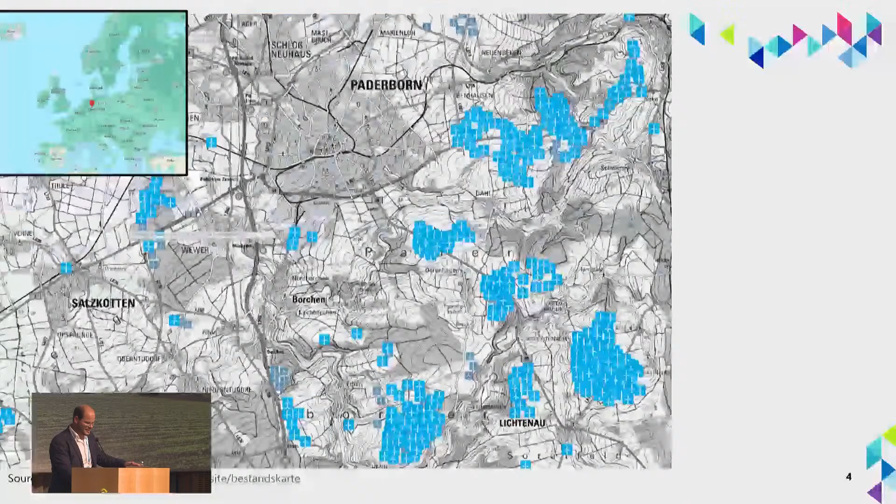Let's switch to a map that makes it easier. I hope you can see it on the left and right side. This is the city of Paderborn, surrounded by small villages, and especially in the south and east of Paderborn we have a lot of wind turbines. By the way, if you want to visit us, we are somewhere there in Germany.

So we are not a coastal region. Usually at the coast in Germany or in Denmark we find a lot of wind turbines, but we are about 200 to 250 kilometers away from the coast. So it's not a coastal area, but we have these wind turbines.

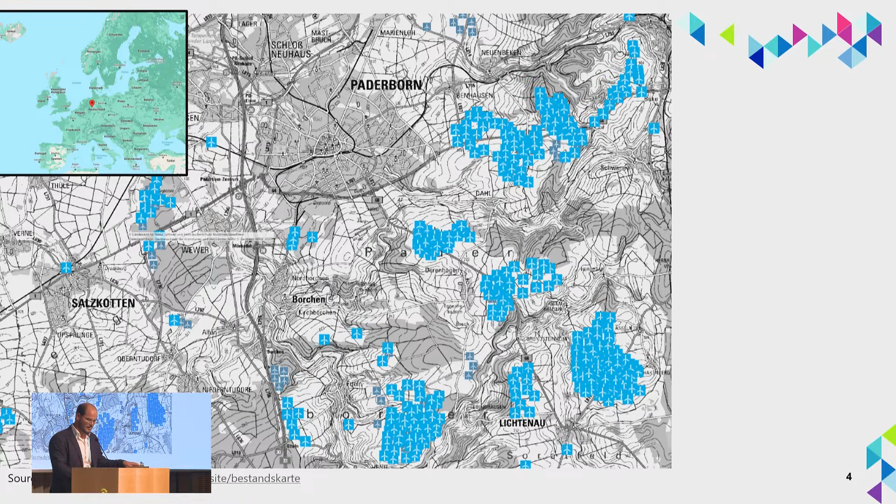In addition to wind turbines, we also have PV systems - a lot placed on rooftops, ground-mounted systems, and so on. And as you've seen on the first slide, we have agricultural land, so we also have some biogas and biomass plants, shown as the little green dots on the slides.

So we have a lot of renewable energy there in Paderborn, and the discussion was always, are we on track or not? I would guess maybe Paderborn, yes, but Paderborn is not all of Europe. So I want to show you a few figures.

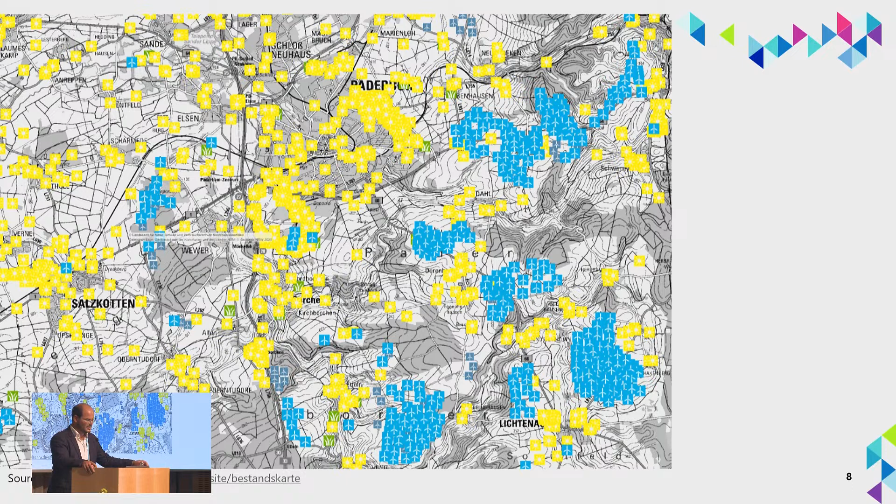Let's come back to this map, because I mentioned we have renewables in the system, and now we can decarbonize our power sector. But there's another thing in Paderborn which is very important: we have a lot of industry there. That makes it different to coastal regions in Germany where we don't have that much industry. In Paderborn you find industry, for example Heidelberg Cement, now Heidelberg Materials, a cement producer, a very energy intensive industry.

Benteler Steel Tube, they do not produce steel, but they process steel, let's call it a cylinder, to make the tubes, so they need a lot of heat to run their processes. And we have some others. Paderborner, that's the name of the brewery - usually in Germany we just call breweries like the city. When you're in Paderborn, the beer name is Paderborner, not the best one in Germany, but anyway, they need heat to run their processes as well. Stute, they cook marmalade and make juices and so on.

So we can think about the heat that they use, and I want to roughly split that into a few heat temperature levels. Heidelberg Cement and Benteler Steel Tube need high temperature heat - they have to glow the steel cylinders, burn the clinker and so on. Whereas Stute and Paderborner need low to medium temperature, so you will not cook your marmalade at 1000 degrees Celsius, but something between 100 and 150, I guess.

And then there are some other industries like Benteler Automotive, Claas, they produce harvesters. For them, the majority of their energy use is electricity to run the manufacturing lines. So you see we have different temperature needs.

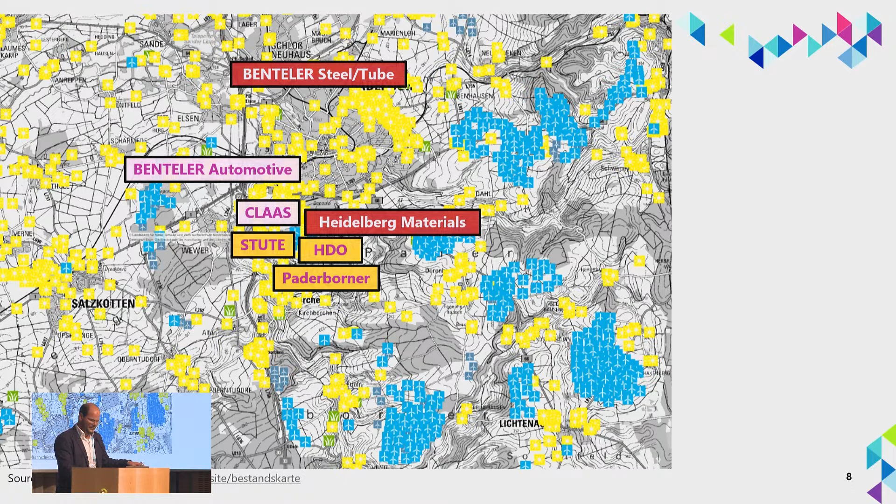Now, if we want to figure out how to decarbonize industry, we have to think about what the energy needs are. If we want to supply industry with renewables, you start with the needs and figure out what they need - electricity, heat, or anything else - and then think how we can supply that. Which temperature level is must, or do they use in their processes? How can we arrive at this temperature level?

For example, Benteler Steel Tube at the moment uses a lot of natural gas, but they see that first, natural gas is not the best solution if you want to decarbonize your processes, and also the price is rising for natural gas, so they think about other things. For them, the easiest and simplest way is to just say, give me any green gas, and I can run my process as it is, just replacing natural gas with green gas, and then I'm fine. You see the capacities built there, and we heard this wonderful lecture of Eva on Power to X - we have the capacity of renewables to produce renewable gas, hydrogen, or other fuels in the region, and there are ideas to do that, but maybe that's not the best way.

Maybe we can rethink the process design. Maybe we can find other places to first reduce the energy needs. So the question that arises: what are the energy needs? Which energy carrier can we use? What is the resulting energy demand that needs to come from the grid? Which conversion technologies do we use? And what about transport?

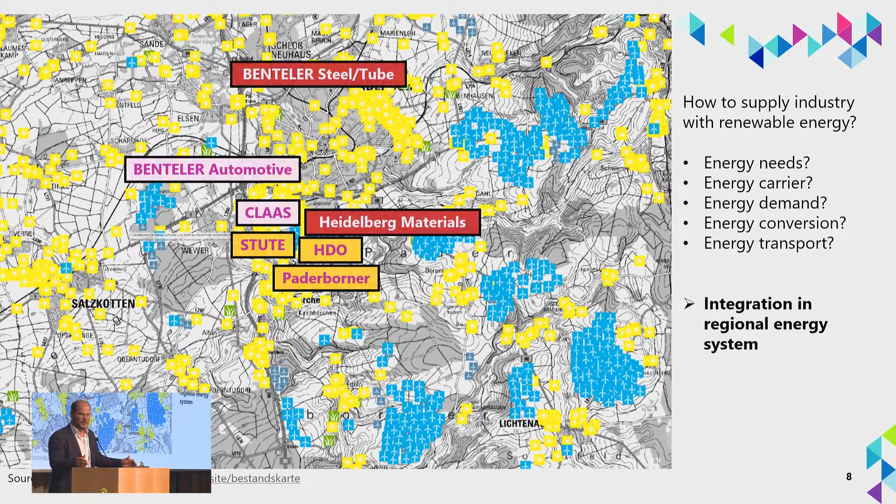And this is the point where we say, okay, if we want to decarbonize industry, we have to think of industry in the integration of regional energy systems. So what do we have, what do we need, and how can this match?

Let's go to a more global view, and I'll show you the final energy demand worldwide. We have transport, the dark blue part below, but I don't want to talk about transport today. Then we have households, also mentioned in the last invited lectures, on how to decarbonize our building sector. But the red part, you see, 30% of our total final energy demand is used in industry, and of that, two thirds are used for process heat.

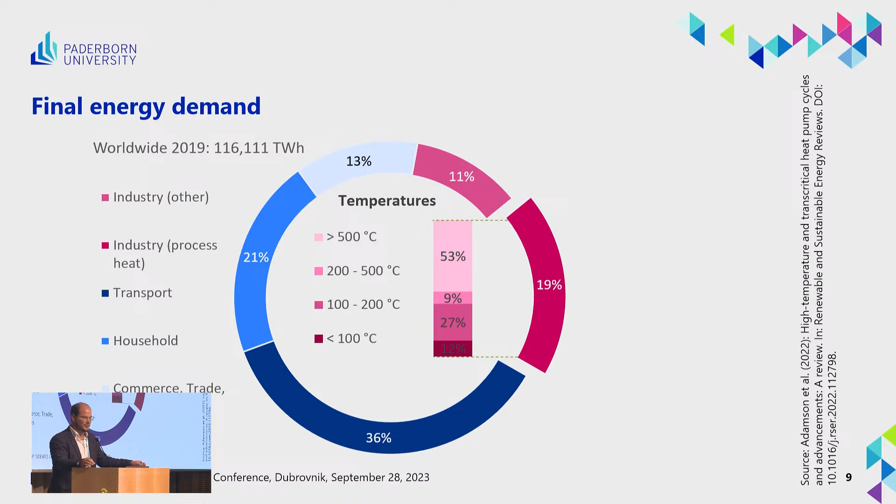If we step into this process heat, you see that more or less 50% of the process heat is used for high temperature applications, so above 500 degrees Celsius. But there is still a high share of process heat with lower temperatures - 100, 200, 300 - and for that we can find different solutions than for the high temperature heat demand.

Looking at the energy carriers, unfortunately most process heat is produced by fossil fuels, with natural gas as the dominating energy carrier. We still have coal, mostly in the steel industry, and oil, as well as electricity and district heating. Renewable energy only accounts for about 9%, and that needs to change if we want to decarbonize industry and reach our climate goals.

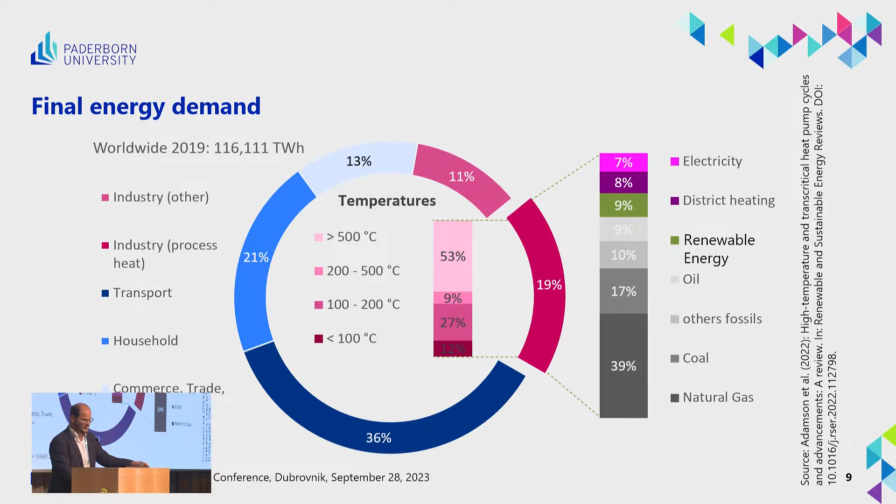Just one step back - why do we have these high emissions in the value network? A big part of the greenhouse gas emissions are caused by burning fossil fuels. Some processes have process-related emissions, like the cement industry when they burn clinker, but mostly the emissions come from the use of fossil fuels somewhere in the value network. It might not be in your own company - if you buy steel, somewhere upstream they used fossil fuels to produce it.

In this project we started an approach called Climate BOWL. OWL is the region where we live, so you can make funny names out of it. The funding agency just said, 'Climate BOWL, like Super Bowl, let's do it.' So sometimes a good name is a good thing. But we started to have a holistic view of this value network.

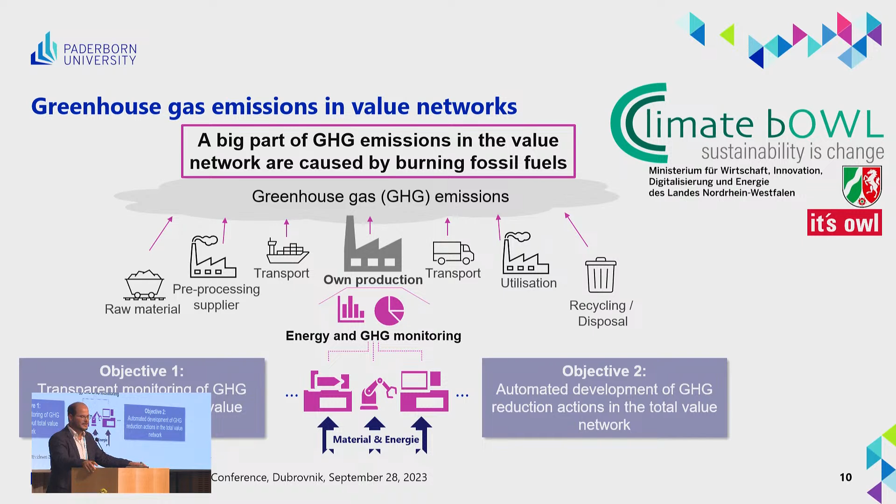Objective one was to have transparent monitoring of greenhouse gas emissions throughout the total value network. Then, once we know where the emissions come from, we generate reduction actions to see exactly where to reduce greenhouse gas emissions in our value network.

We can see that, for example, in wind turbines. We have the tower made of steel and the foundation, which is reinforced concrete. I'm happy that the Danish manufacturer Vestas shares all his life cycle assessment data for his wind turbines. What you see is that most of the greenhouse gas emissions of renewables come from exactly the steel and concrete used in manufacturing.

The operation is almost free of emissions, as you all agreed. That means once we have sustainable materials, we will decrease the greenhouse gas emissions of renewables again and again. So there's a must that we have sustainable steel without any greenhouse gas emissions, because otherwise our renewables are also not free of greenhouse gas emissions.

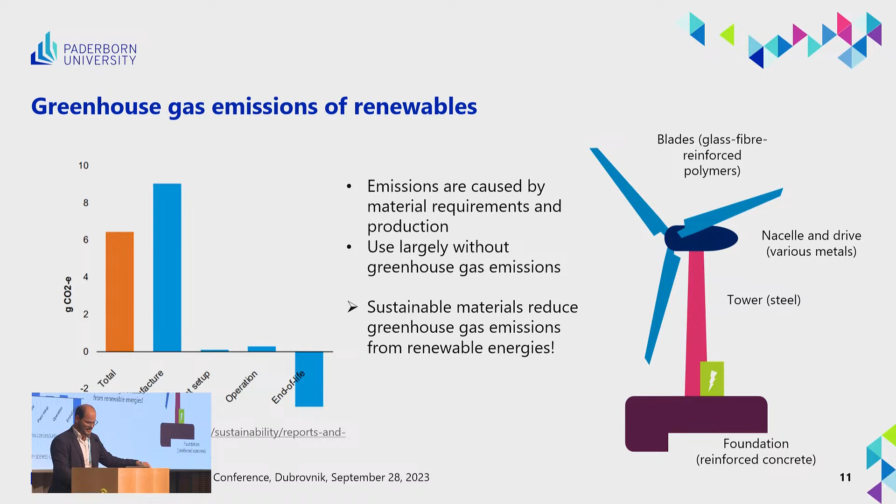Okay, let's come back to heating. Neven already showed this slide, so there's no new information here. We can heat with a natural gas boiler, which gives direct emissions, or with a heat pump as a very efficient technology. I just assumed a COP of 3 here.

But if we use heat pumps without changing our energy supply - heat pumps with coal power plants - that doesn't work. We just shift the emissions from heat production to electricity generation, and that's not the best idea. We have to think of the whole system: electrification of heat supply with the heat pump, but also decarbonization of our power system with renewables.

I've shown here the direct greenhouse gas emissions. Of course there are embedded emissions in renewables, but let's assume we can solve that once we have enough green steel and green materials. This is called sector coupling - coupling the heating sector with the power sector. Even more importantly, we can decrease our primary energy demand, shown here. Once we use renewables and a heat pump, we can decrease our power demand and primary energy demand a lot.

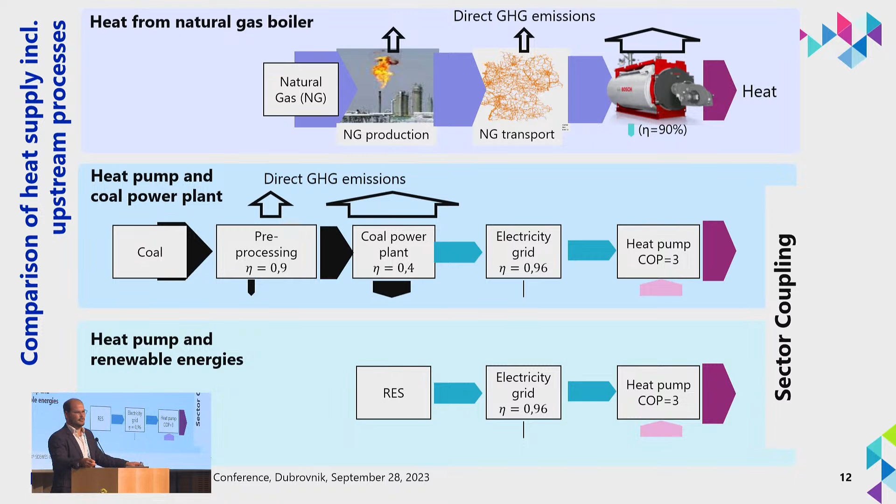So we have technologies that could decarbonize our heating system, but we've also talked a lot about efficiency. In industry, there are efficiency measures, and good papers discussing heat recovery - either directly to preheat steam, shown here on the left with the example of electroplating, where we use waste heat to preheat a freshwater stream. We can reduce our natural gas consumption and also our electricity consumption, because we have combined heat and cooling.

So once we use waste heat, we need less, we don't have to remove all the heat with a cooling tower or a chilling machine. That can save also electricity.

And if we then implement a heat pump, that's shown here on the right-hand side, you see that we can really save a lot of cooling energy. So instead of using a boiler and a compression chiller to remove heat for cooling purposes and to produce heat for heating applications, we can use a heat pump that removes the heat on one hand, so it cools down the processes that need to be cooled, and on the other hand it provides heat to the process. So we can reduce our final energy consumption by integrating heat pumps and doing this waste heat recovery.

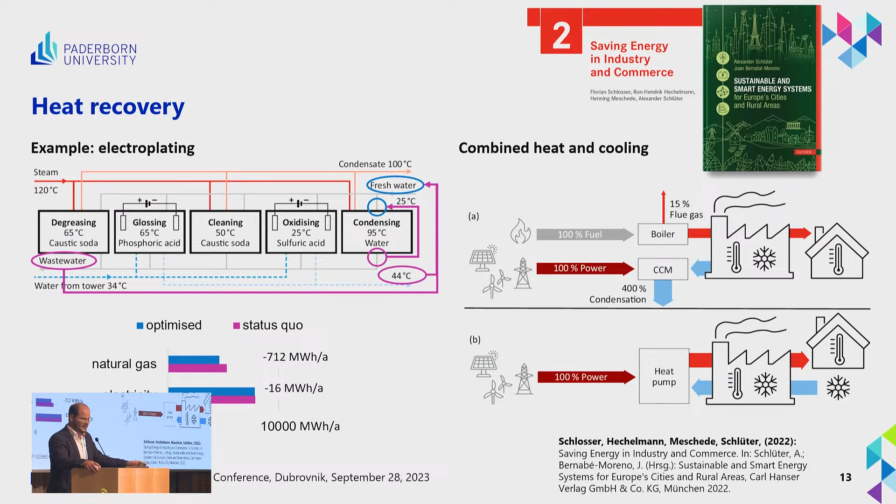Okay, so we see there's a lot of different actions that we can take somewhere. We can talk about energy efficiency, we can talk about the change of energy supply, but how should it look in a holistic smart energy system design?

I'll try to make a complex thing simple, so we lose some information, but it helps to understand. Take the example - I hope the air conditioner is on, and I'm very happy that it works. We have an energy demand, we have to remove the heat from this room. So we have an energy need to reach a certain temperature here on stage and in the room, and to provide fresh air to all of us. Therefore, we use a technical system, an HVAC system with a chilling machine maybe, and we have a final energy demand - somewhere we need electricity to run our technical solution.

And at the end of the grid, there's an energy supply. As mentioned before, we can look at different actions on these three areas. For example, to reduce the energy need, we can think about better retrofitting of buildings, the correct setting of operation points - is it really a good temperature here in the room, or could it be higher? We say it could be, not for me, but we think about how we can save or reduce our energy need.

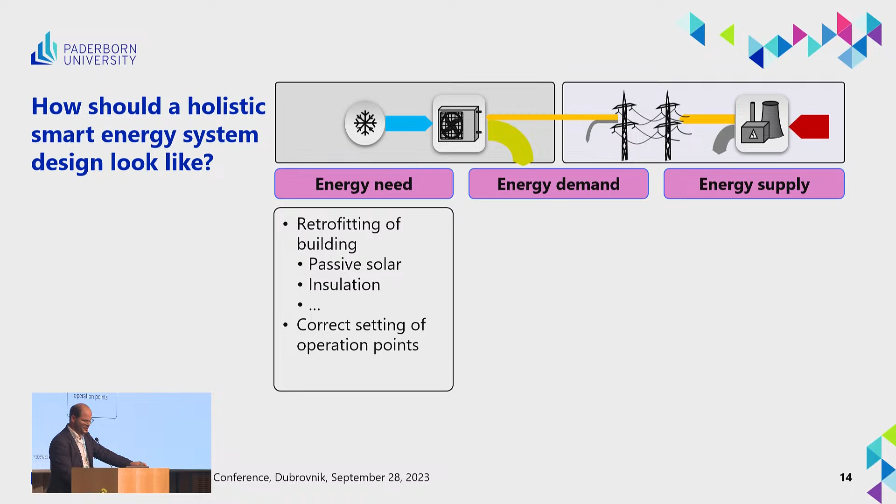Then for the energy demand part, we think about how to replace the technical system. Can we use a more efficient chilling machine, for example? Can we improve our ventilation system? And finally, on the energy supply side, how to replace fossil fuel power plants with the use of renewable energies, for example. How can we integrate cogeneration or trigeneration?

But once we talk about renewable energies, we also have to talk about how to overcome the problem with fluctuations. So we need storages, we need demand response, and that causes other issues.

From an energy efficient point of view, you would start on the left side with the energy need. So first reduce the energy needs, then the energy demand, and then think about the energy supply. But we don't have time to do it in that way, so we have to take actions on every part mentioned here.

This thing with renewables changed a little bit the way of thinking, because now we don't talk about pure energy efficiency, but about system efficiency. There's still the question of reducing energy needs and increasing energy efficiency, but there's also the question of how to make the best use of fluctuating renewable energies. That can mean we run systems in a not optimized, not the most efficient way, but with renewable electricity.

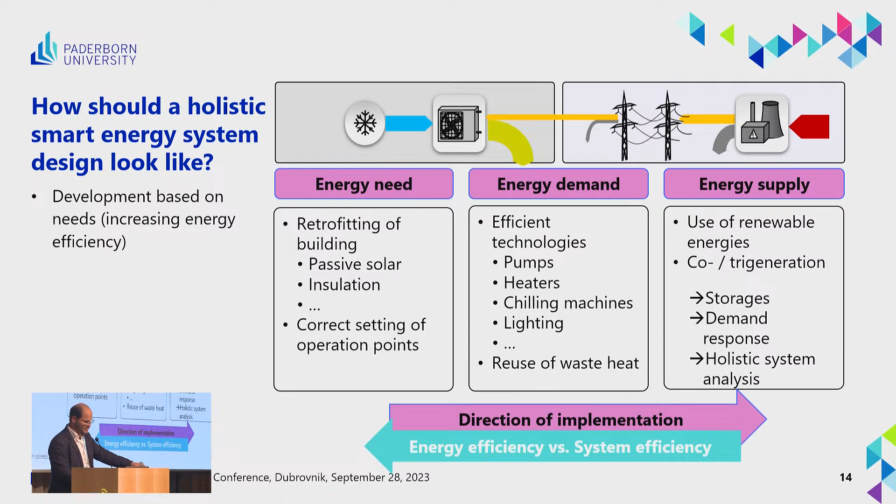So the development of a holistic smart energy system should be based on the energy needs - we have to understand why we need energy. Renewables will change it, and we have other things coming up that are now very important to decarbonize all sectors. One is sector coupling, and the other is flexibility to meet fluctuating renewable power generation. So system efficiency is a new objective of smart energy systems, and that leads to other questions: what does flexibility mean, and how can we use flexibility?

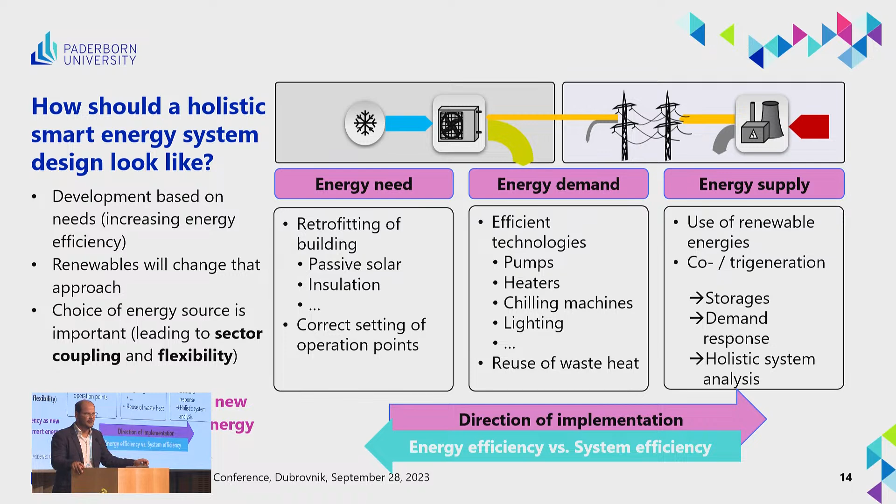And we have done a study - I hope the picture looks good. We made a study about load shifting. You all know load shifting, and usually we just use electricity prices for load shifting, arguing that in times when the electricity price is low, we should increase our demand, and in times when the electricity price is high, we should reduce our demand.

The idea behind that, from an environmental point of view rather than an economic one, is that if we have enough green electricity within the grid, the prices will be low, because the cheapest way to generate electricity is with renewables.

And if we don't have that much renewable in the system, then the price should be high because we run our gas turbines or something like that. You see in this diagram, this is from the year 2018 in Germany, but we have done that also for other years and other areas with different energy mixes. And you see that it's true. On the x-axis you see the electricity price, and on the y-axis you see the current emission factor.

Of course the emission factor is not constant over the whole year, though sometimes we use it that way to calculate. But we have times when there's enough renewable electricity that our emission factor is low, and we have times when there's almost no renewable electricity, and then we have high emission factors. On the left side and the right side it works - we have low electricity prices and low emissions, and we have high electricity prices and high emissions. But in between, I wouldn't say there is a good correlation.

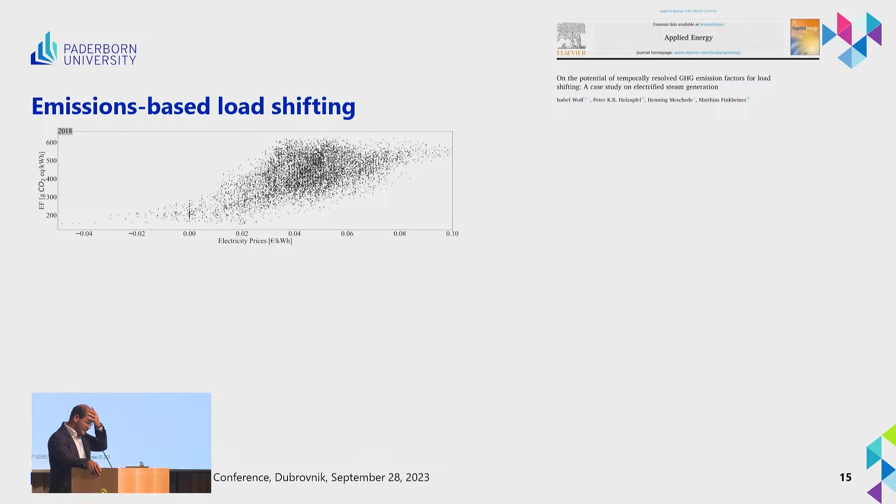So finally we figured out that the correlation factor is something about 0.6 for this case, which does not mean there is a strong correlation. Using only a price-based load shifting will not automatically lead to reduction of greenhouse gas emissions. And that's what we tested with the example of the food processing industry.

They have a steam demand, and we said, okay, we can electrify the steam demand. That's possible. So we take an electric steam boiler and add a steam accumulator, so we have storage capacity. Now we can play around and run the system in a more flexible way, using an optimization approach to do that.

We analyzed two different scenarios mainly. One we called EBLS, emission-based load shifting, where the price signal is the emission factor. And then we have another scenario called PBLS, where the signal was the price, the electricity price.

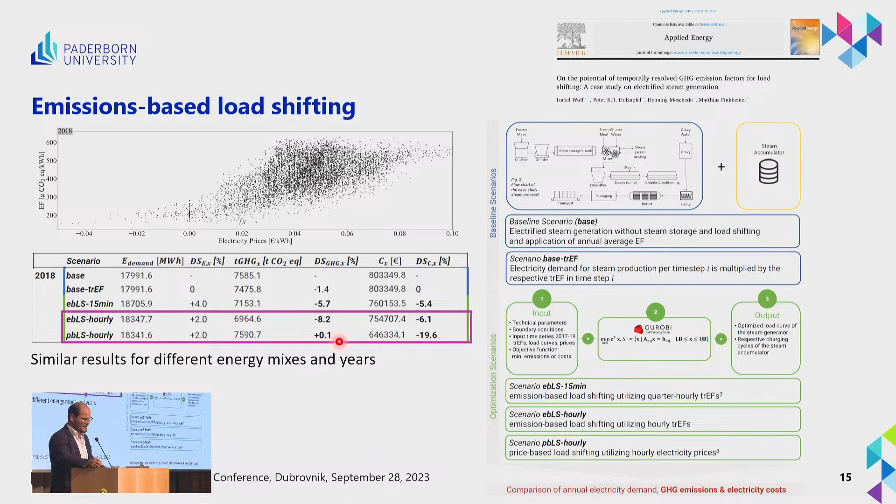You can see from the results that indeed, if we use the electricity price, we can reduce our energy costs a lot - down about minus 20%. But there was no change at all in the greenhouse gas emissions. And once we use the emission factor, we saw that we can reduce the greenhouse gas emissions by minus 8%, and there was still a decrease in energy costs.

We analyzed that for this case, this year, this area, but also for other areas in Germany with different energy mixes in different years to see if it really looks like that, and it was the case for all analyzed settings. So emission-based load shifting minimizes emissions while reducing costs, whereas price-based load shifting primarily brings economic benefit but not automatically ecological benefit.

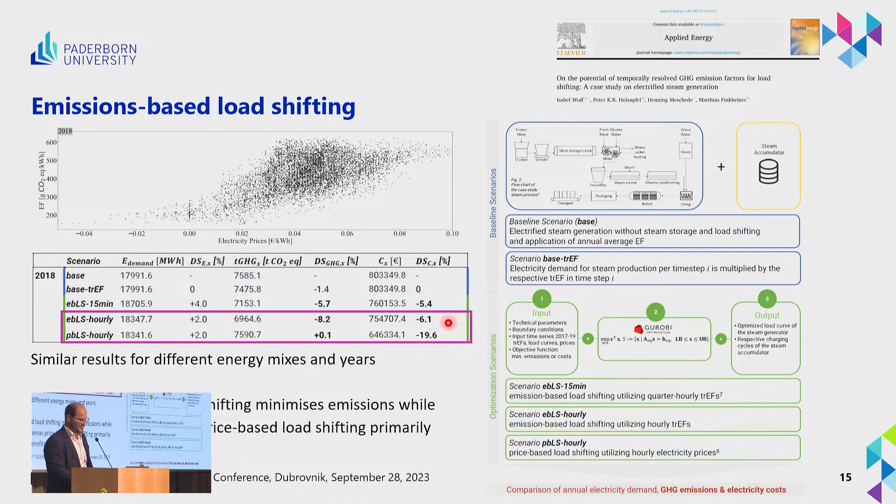That's a big issue if you discuss demand response, and I'm pretty sure we need flexibility and demand response in our energy system once we change it to renewables. But then we should be sure that we have the right mechanism and the right signal to do our demand response. And then there was another question about efficiency or flexibility, or both together.

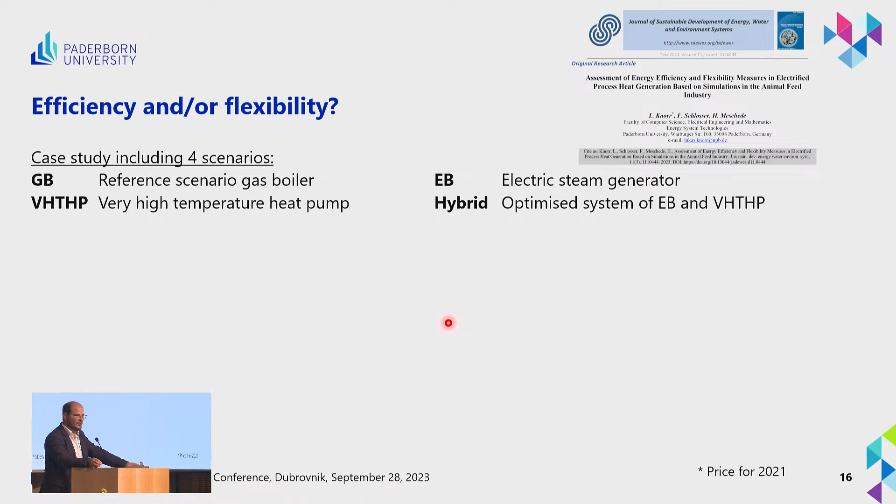We analyzed the same process shown on the last slide. We analyzed four scenarios: the reference case with the gas boiler, an efficiency scenario with a very high temperature heat pump, a flexibility scenario with an electric steam boiler, and a hybrid one where we try to optimize both the use of the electric boiler and the heat pump. I'll show you the results.

The efficient scenario in this case was really good because we could reduce our greenhouse gas emissions a lot. And if we add flexibility, we could reduce it even more. If we use only the electric steam generator without optimization, there was a big increase in the greenhouse gas emissions.

If we look at the economic side of this analysis, we unfortunately saw that for the energy prices of 2021, where gas was still cheap and electricity was not that cheap, the natural gas boiler was more economic than the other solutions.

If you do this analysis again with the prices we have now in Germany or even Europe, the average prices, you will see a different result, because we've seen there is a high sensitivity on the energy prices, and we have to reduce our electricity costs. The natural gas costs will automatically, I would say, increase. Then we see there is a certain ratio between electricity price and natural gas price where all these electrified ideas make economic sense.

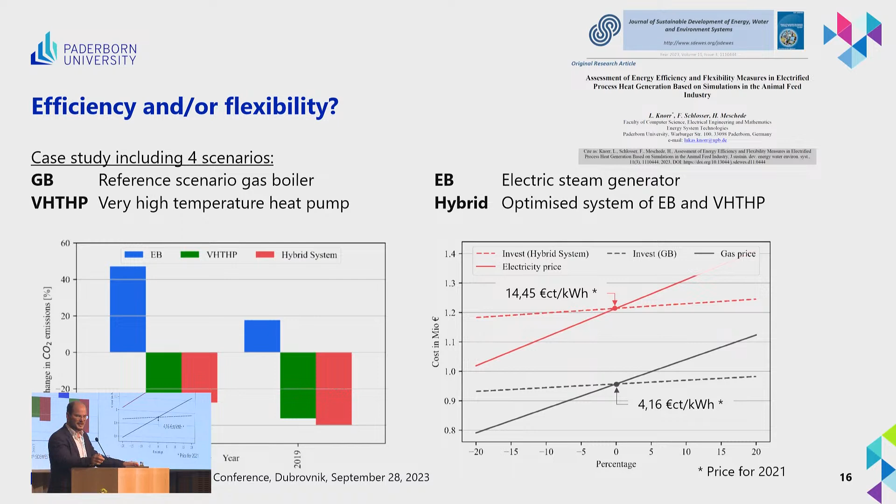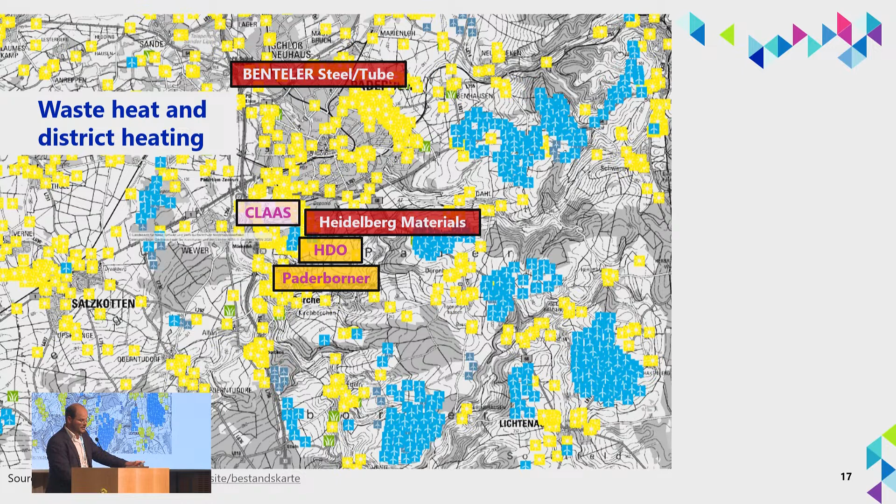I'd like to come back to this map of Paderborn, because I promised Henrik I will say something about district heating. As mentioned, we have industry with high temperature heat, and they produce high temperature waste heat. Why not use this high temperature waste heat as a source for district heating, as discussed a lot in our scientific papers? We actually do that in Paderborn, using the waste heat from Benteler steel tube to provide heat to some public buildings.

In the south, we started a feasibility analysis on how we can use the waste heat from cement production to run other processes in other industries. But if we want to do that, you should always think about the case. If the temperature in a Benteler steel tube process is 400 degrees Celsius, maybe it's better to first run a process with low temperature needs before going to the district heating system. And then there's the case of what we should do with our district heating once Benteler steel tube moves away or changes their production completely. So we have to think about robust systems as well.

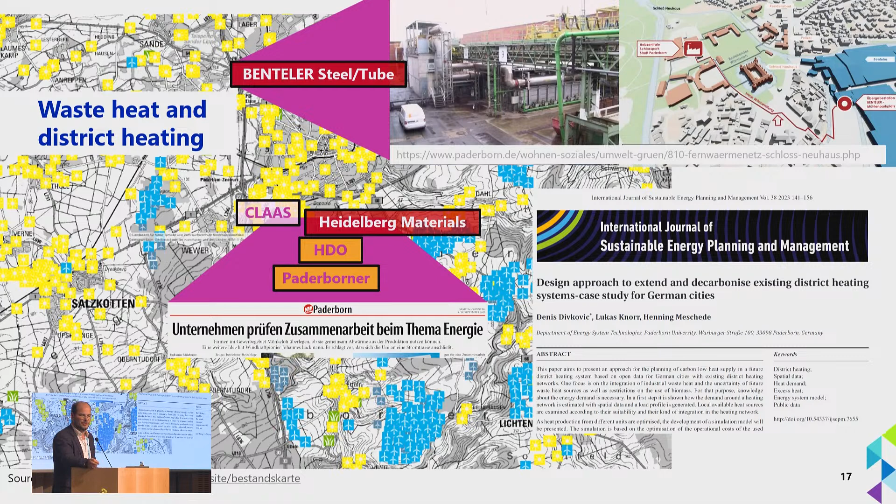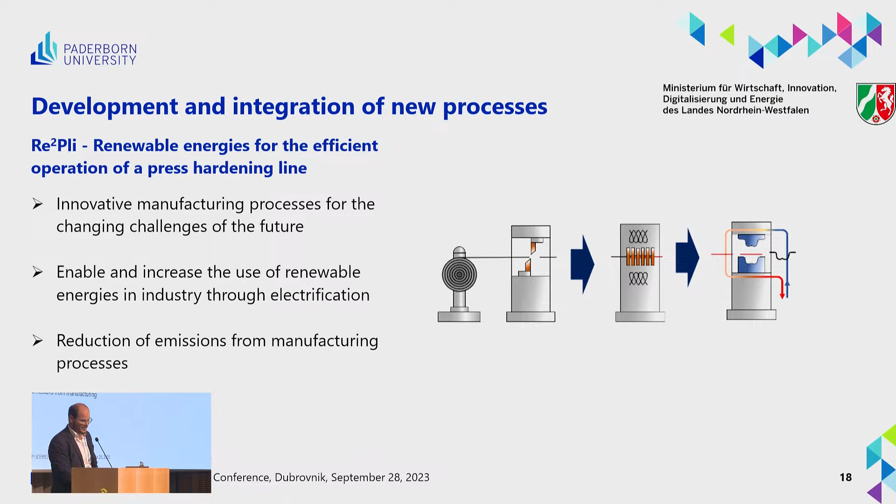There's some interesting work on how to change our production systems, because they will not stay as they are at the moment forever. This is a project called Re2Pli, where we change a press hardening line. Usually you have a furnace to heat up your metal plates before bringing them to the press, but we can use an induction heating system instead. That changes the way waste heat is produced, and it also changes our energy demand from the grid, because now instead of gas we need electricity. We have to check if the infrastructure is already made for that, and how we can use, for example, energy storages and renewable energies to run the process.

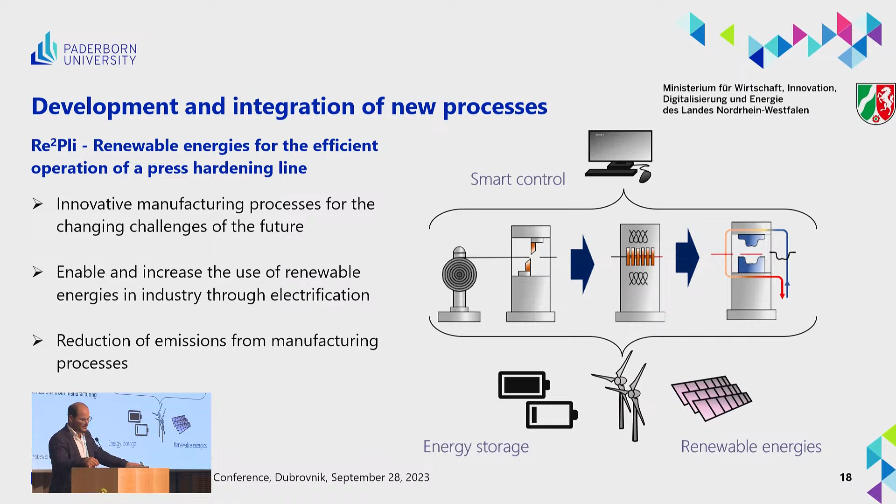Definitely not the data centers built in Frankfurt for trading - I think the bankers will kill me if I say you can just do your trading when there's enough wind in the system. But we have other computational tasks, like scientific modeling, which is critical, but maybe not that critical. So we have a little bit of flexibility to run our computing tasks.

There's another good thing if we build this - or maybe it's a bad thing, I don't know, we can discuss it later. Once we build the data center in our wind turbine, we can use the tower itself for cooling, so we don't need any other cooling system. But that means we cannot use the heat for district heating. So you see, there are always a lot of different sides to look at a problem, and definitely not all data centers will move to wind turbines, but some of them should.

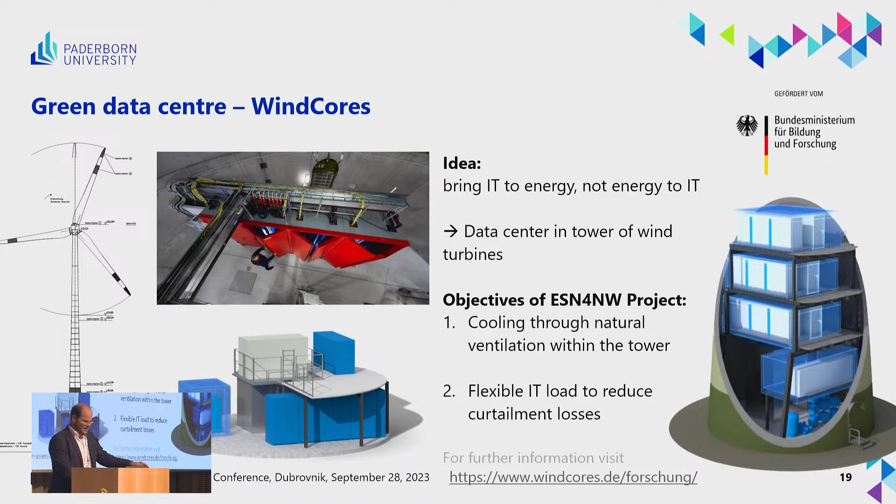Okay, I think I have to come to an end. That's what we discussed today, what I've shown: the energy transition within industry linked to renewables, mainly wind and PV, and how to link industry and business with the district heating system. But we have other issues, so we have to discuss super-regional aspects. Why should we use the energy in Paderborn? Maybe it's better to transport it elsewhere, to rural areas or to Bavaria, I don't know. But we can use it as well in our own region. And we discussed the industry and high temperature applications - for that, there will be a use of e-fuels or hydrogen, so we have to produce hydrogen.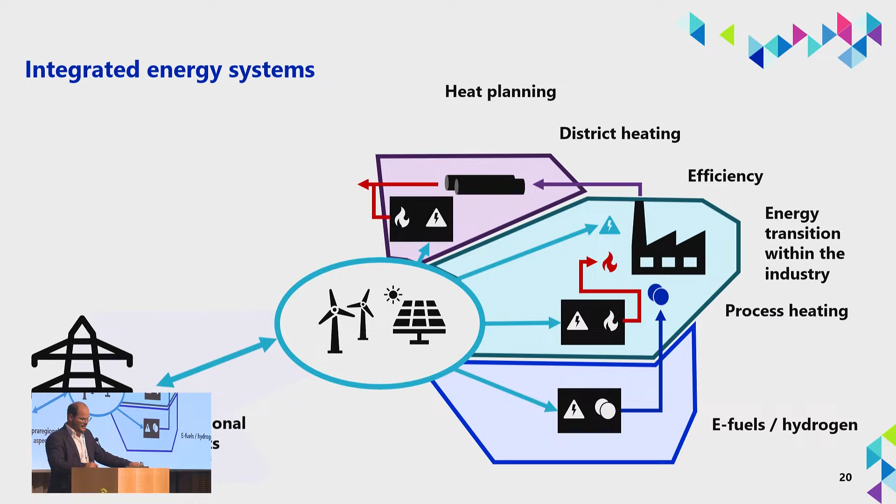Then we have district heating. There we can also use electrified things like heat pumps, and we have to discuss to which extent we use district heating, to which extent we use individual room heating, and how to combine both.

We talked about load management and energy storages, and last but not least, we have this big part of new mobility. I think it's not enough to just change a car with an electric car. I mean, we can do that, but that doesn't make sense. We have to change the way we demand mobility, and figure out different ways to move from one place to another.

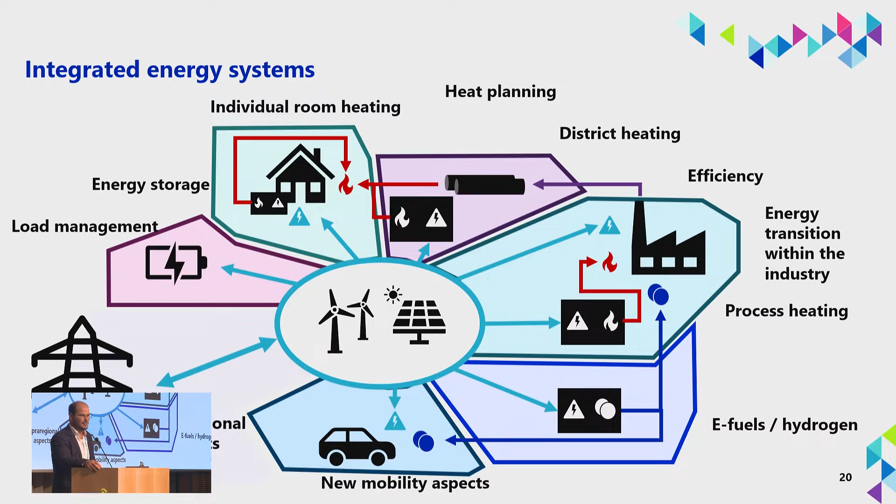Maybe car sharing is a good option, but once you use car sharing, the cars have another driving profile, and that might change the vehicle-to-grid concepts. And at least we can also use hydrogen and e-fuels in the mobility sector. I hope not for car driving that much, but for aviation and shipping, that might be an option.

And with that, I come to an end. So we see that renewable energy is a must for sustainable industry and commerce. We saw that energy efficient system design starts with understanding energy needs. We should have a holistic view on the energy system, starting from the needs, but including demand and supply. The term efficiency switches from pure energy efficiency to more system thinking, to think how to integrate variable or fluctuating renewables in an efficient energy system.

Electrification is a promising solution for decarbonizing process heat. The best way is to do it with direct electrification, but for applications where we don't have the possibility or the technology yet for direct electrification, there might be a way of indirect electrification via e-fuels, but...

4.16 euro cents. That's interesting. That's what I get for this lecture, no? Let's see. Not that much.

Anyway, yeah, electrification. But we should also remember that there is no steady state of production or mobility. So once we try to solve this big issue of decarbonizing, our energy needs will change over time. There are new technologies, new applications, and we have to build robust systems and robust integration that can work with changes as well.

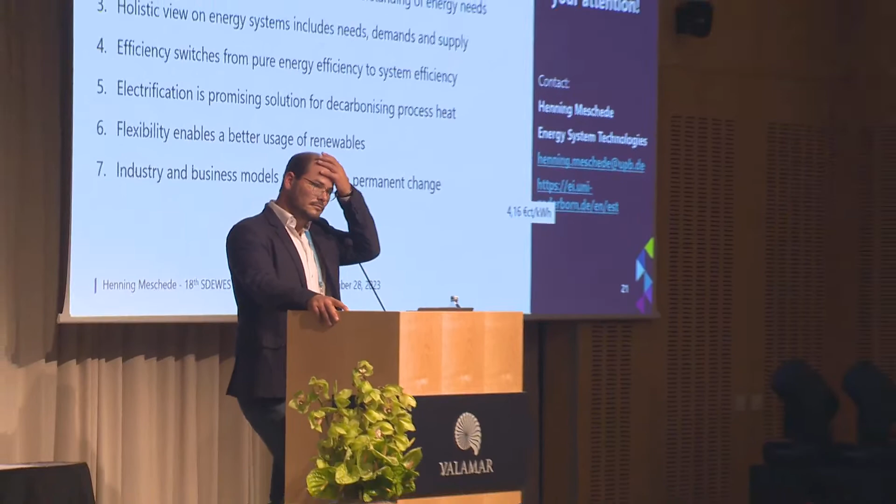I would like to ask about your opinion about small-scale nuclear power plants. In Finland, we have had a lot of discussions about small-scale nuclear power plants providing district heat. So what is your opinion about that? Are they sustainable, or what do you think?

In Germany we had a quite long discussion about nuclear power, and finally we said okay, we go out of nuclear power, and I see that there are a lot of other countries deciding to do nuclear power. And your question was if it's sustainable. I would say no, so we have lower greenhouse gas emissions than, for example, burning coal.

We had this discussion in Germany if it's better to run our nuclear power plants for a longer time instead of burning coal. But anyway, if we see the current state, we see that renewables, wind and PV, are much cheaper and much more sustainable.

And but anyway, as you see, there's a permanent change. Maybe once we have cheap nuclear energy and we find a good way to run the system safe and to deal with the waste, so we should be open to discuss it, but from my personal side, I doubt that it's that near in future.

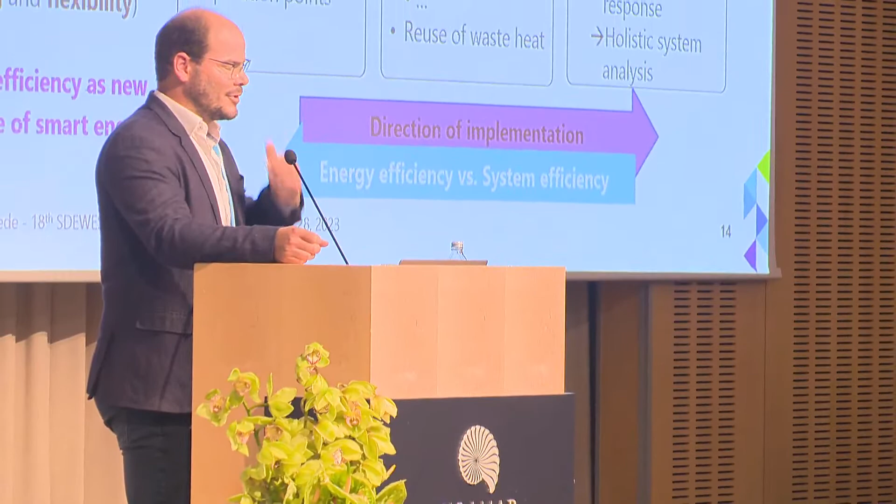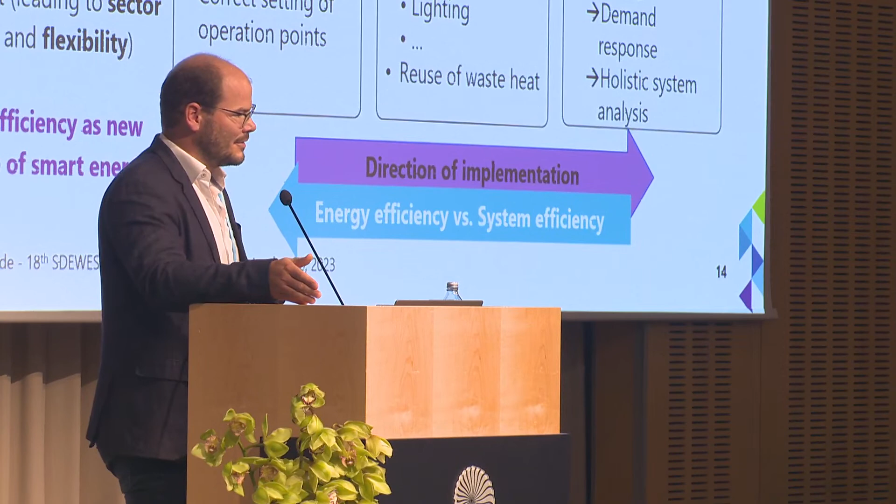Yeah, I mean, you mentioned it correctly. If we have the best way to use it, we first reduce our energy needs. But to be honest, we have a big building stock which will not be insulated and retrofitted in the next years, but we have to deal with our greenhouse gas emissions. So I think that's the first point, that we don't have the time to do things in the right way. And then we are all humans, and humans do not behave like researchers and engineers want them to behave.

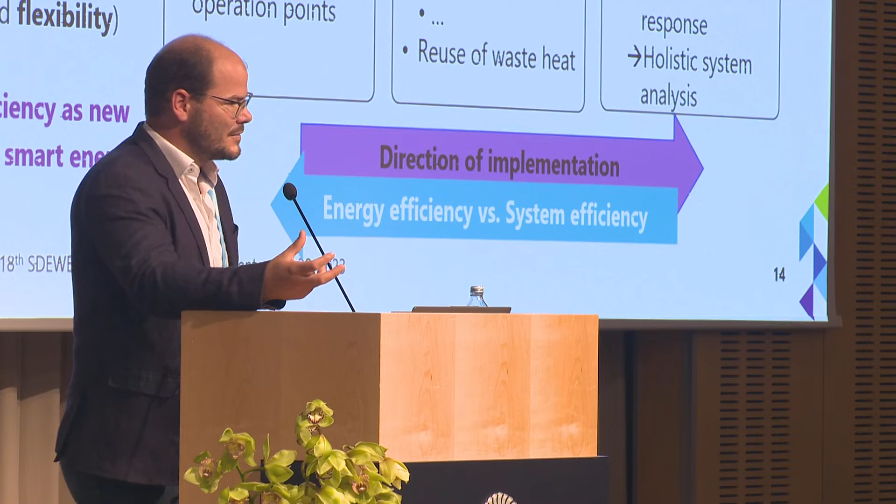And we have a change of our houses, so we have to make robust systems that can work. We have to do a lot of insulation and retrofitting, but we have to think about decarbonizing the heat supply at the same time.

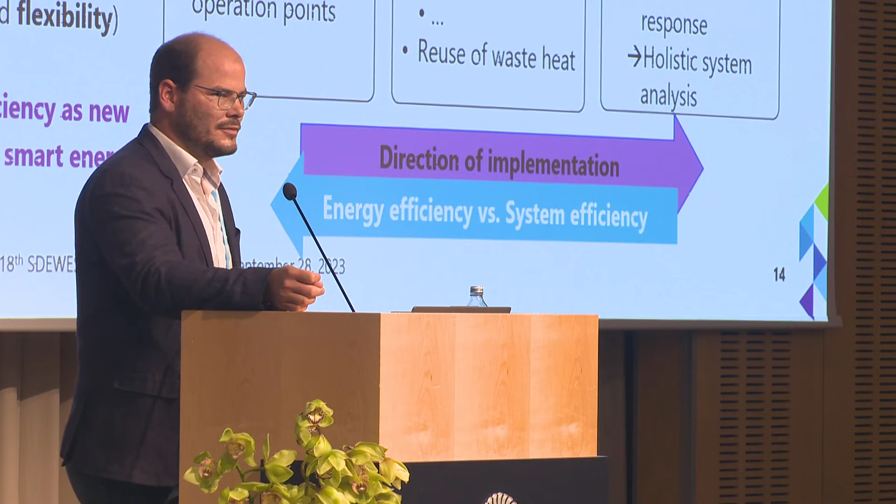And then you ask, what would be an optimized way? I would say that depends completely on the conditions and the area where you are. We discussed now with some communities around our city how to do this heating planning for the communities. And it completely depends. If we have a village with small single-family houses with owners of their own house, maybe you can convince them more to invest in retrofitting measures.

But if you are in a city, where you have big multi-family houses and there's an investor, and unfortunately the investor does not care about any energy savings, maybe it's better to say, okay, you don't care about energy savings, but we care about the energy supply, and we will supply this house with district heating from any waste heat source, any renewable curtailment wind energy, something like that. And then he says, okay, I don't have to care about insulation, but then we will push him again and again, and at some time he has to do it. But we have a decarbonized multifamily house, which is better for us and for the climate.

Does it answer your question? Yes, absolutely. Thank you. Perfect, thanks.

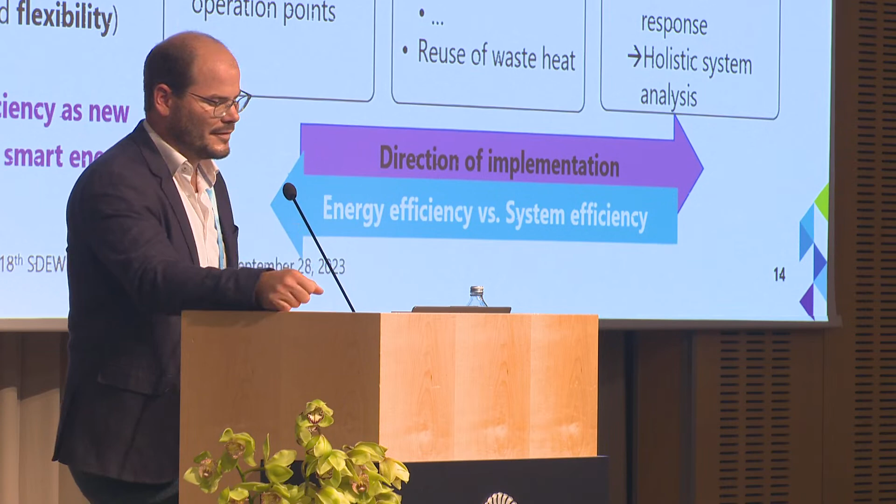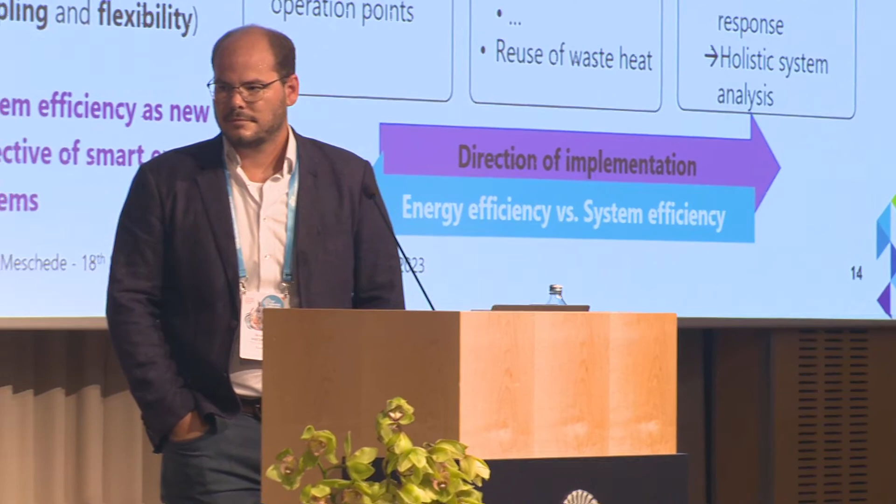I also have a question for you. What is your idea in particular for solar thermal application? For district heating, for example, fifth generation district heating, but also starting for third generation? And what about for industrial processes, hydrogen, green hydrogen included? So what is your idea about solar thermal?

Yes, it's difficult to... no, it's simple to answer. Because if we build solar thermal plants somewhere, they are more or less fixed to the operation and to the use that is there all the time. PV might be a little bit more flexible because we can transport power to other areas.

I like solar thermal a lot, and I think it's a good way to produce low temperature heat. But if you collect all the heat from industry, business, data centers, and so on, the amount of needed low temperature heating will not be that high, unfortunately, I guess. So maybe if we have limited space, it's better to install PV systems instead of solar thermal systems.

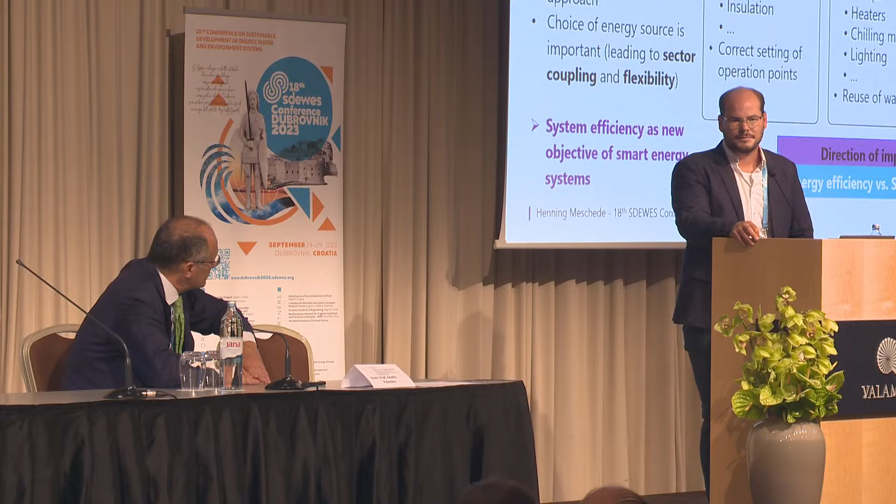But there will be applications of solar thermal as well. So one is in district heating, that's one option. And as you mentioned, in industry, but the industry, I would say, they look more for PV. So if they have the chance to build something on their rooftops, they will look more into PV with a heat pump, maybe, instead of the solar thermal system, which is then fixed to one setting point.

Okay, we have more time for questions, so here, please.

Hi, I'm Luca Cimino from University of Napoli Federico II. Thank you for your brilliant presentation.

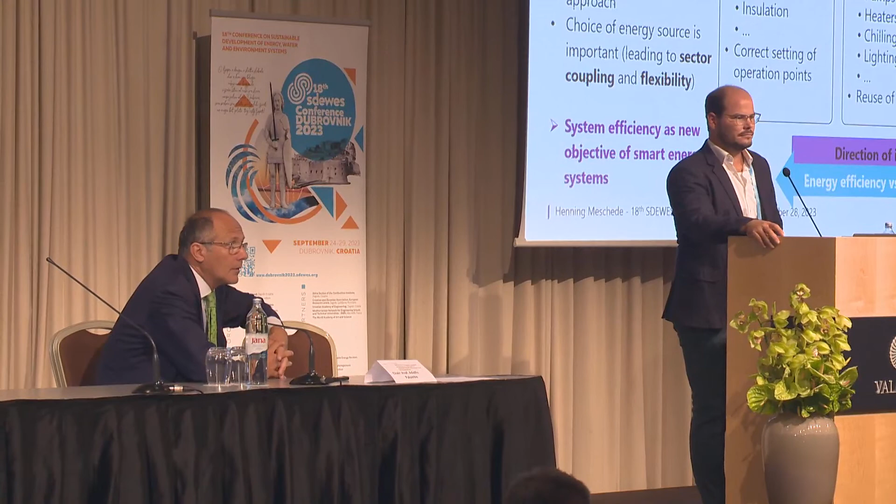I would like to know your opinion about the possibility of integrating biomass gasification into the whole process for producing high temperature syngas, which can be used in industrial processes at very high temperatures, also maybe by exploiting industrial wastes for the gasification process. Thank you.

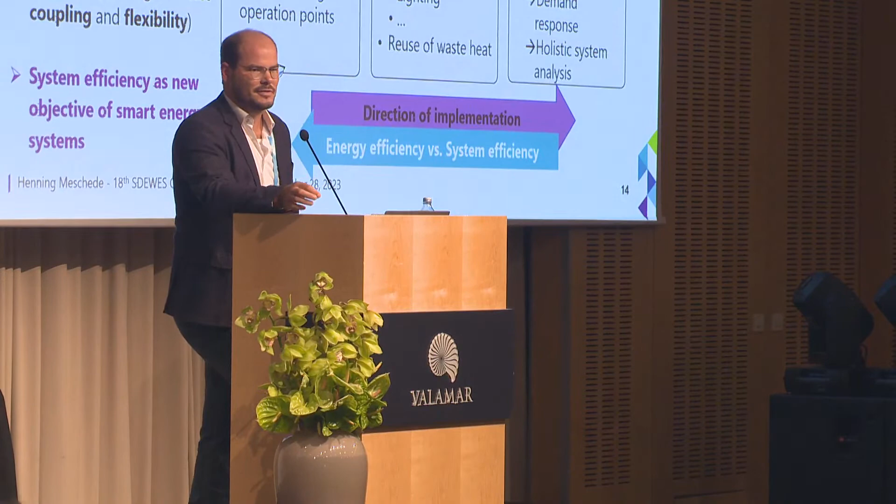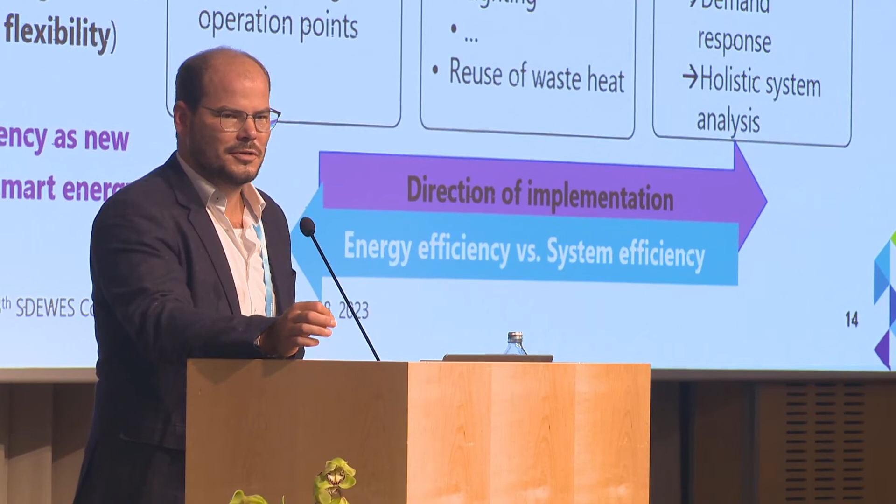Biomass is a very good source of renewable energy, assuming it's sustainable. But unfortunately, we don't have enough biomass to run all the processes, so we should carefully look at which processes should be run with biomass. In my opinion, we should electrify all the low temperature heat processes as much as possible—first reuse the waste heat, then electrify. There are still processes where we have to think about other solutions for high temperature, and if we can use biomass, it's a good solution if we have enough sustainable biomass.

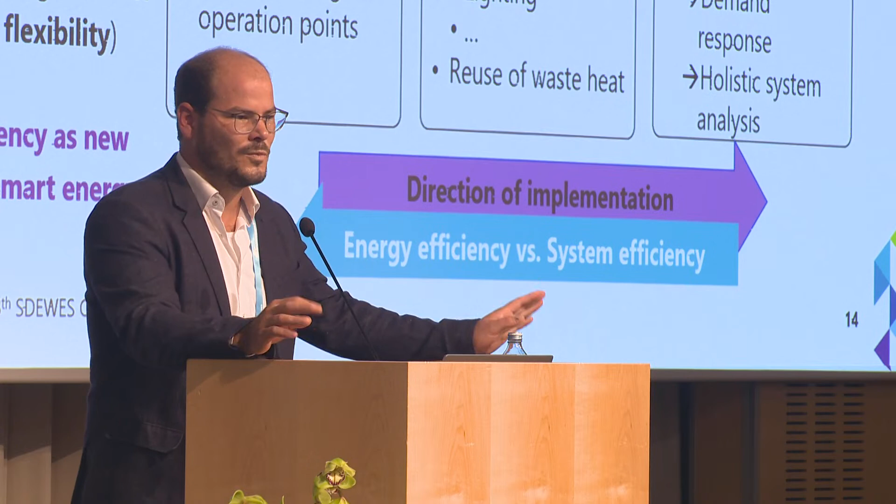Or we use hydrogen and other e-fuels, and maybe there are also some processes where we can burn waste. It's not that sustainable, but for example in cement production we could burn waste because we have to remove the greenhouse gas emissions anyway, so maybe that's the best place to do it. We should use the sustainable part of biomass, and I would prefer to use it in industry instead of at home for 60 degrees Celsius warm water. We have better solutions for that.

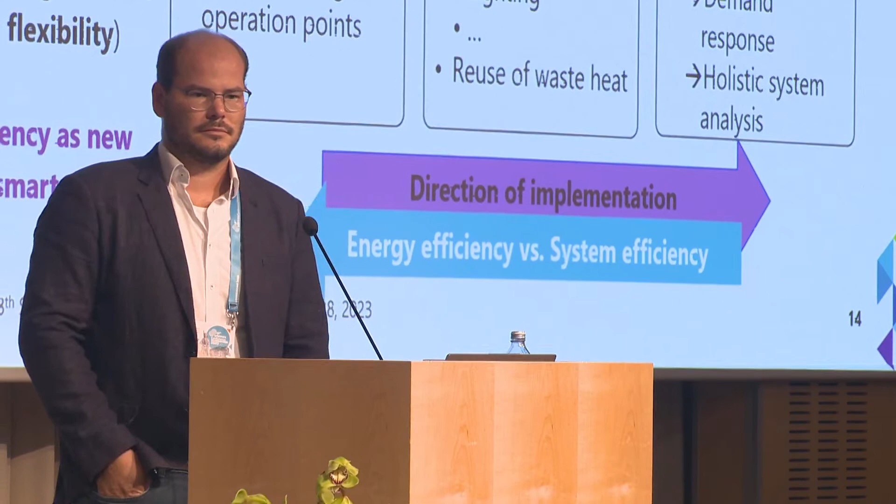Robert Weiss from VTT Technical Research Center of Finland. We have a huge gas grid, even to the distribution level, in Central Europe—in Germany half of households are heated with gas. There will be a lot of stranded assets maybe shifting to heat pumps. How do you see the future of the gas grid, including the gas distribution grid? Can it be a balancing factor, or is it just stranded?

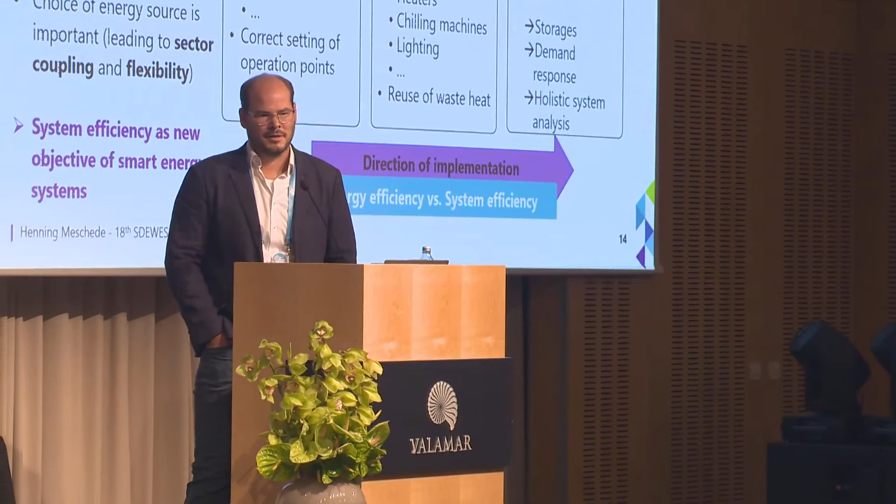To give you a short answer, all the utilities I discussed with—what we call Stadtwerke, the local utilities—they don't see the gas grid anymore as an asset for them. They just say, okay, let's go to district heating or an electrified system, but not in the distribution network.

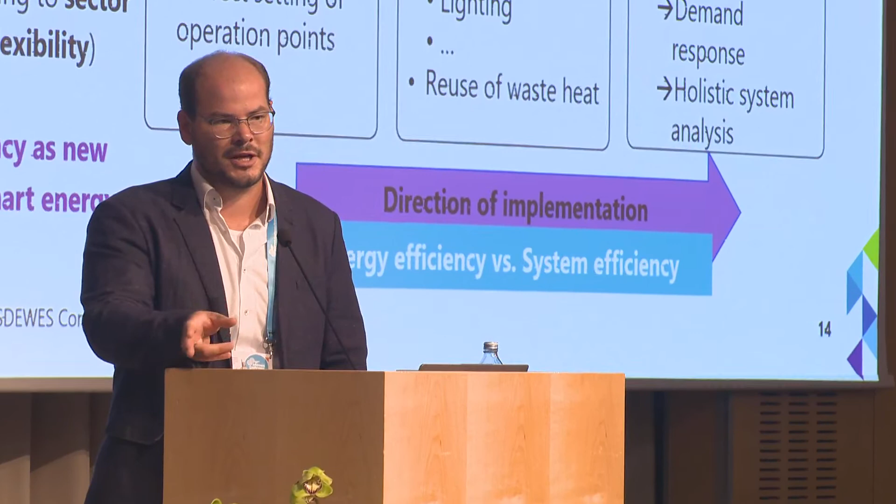It changes when it comes to industry. If you have a big demand for gas in industry, there might be a chance to still run the gas network. And if you have this one customer, there might be other ways to link it to some households as well, but not that much. I would say it's more or less a stranded asset, and they switch to electrified solutions or district heating.

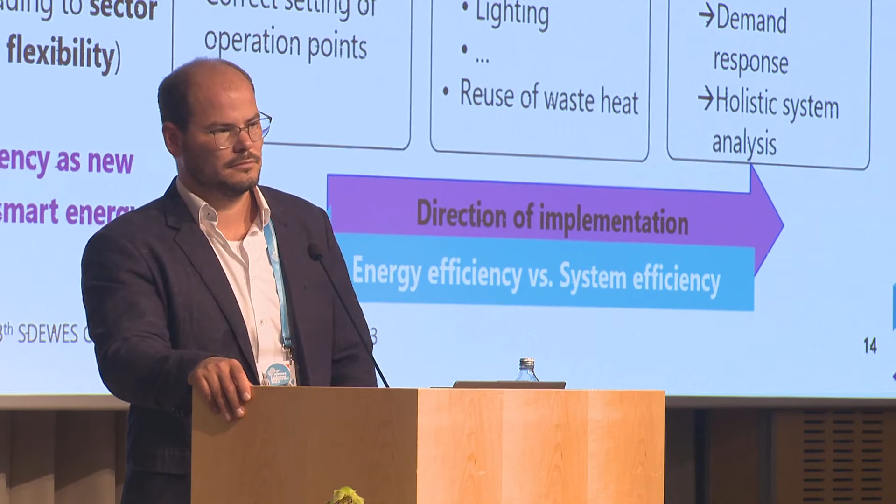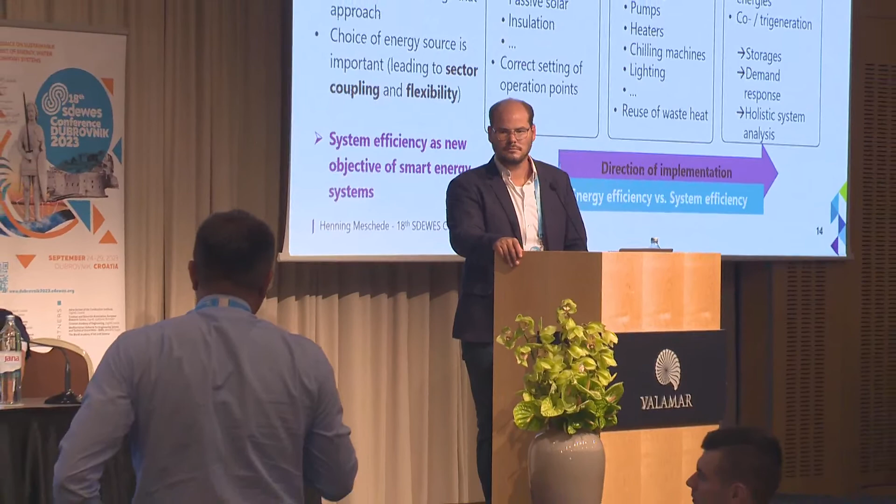Thank you for your presentation. Goran Kraljic, University of Zagreb. On Monday we were discussing energy communities, and Professor Wimsley showed us that in New Zealand they are thinking about energy communities of industry and surrounding areas. Are you facing this, or do you have any example that they started to do that in Germany or in your region?

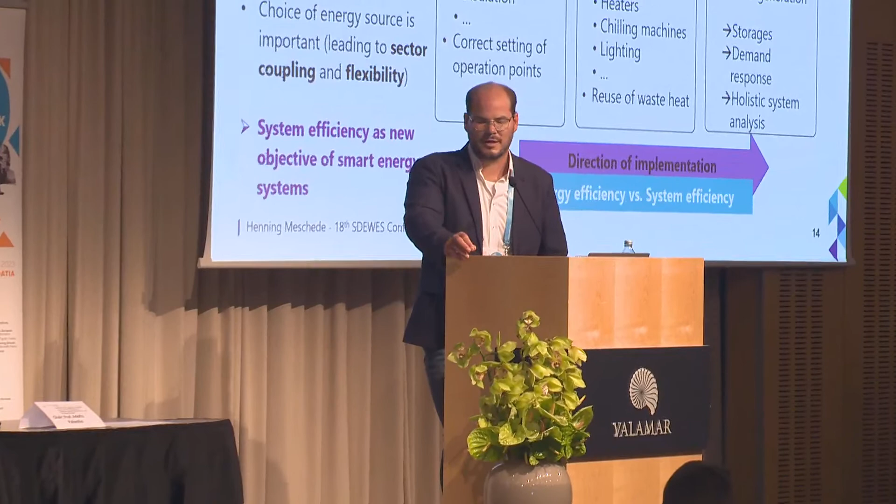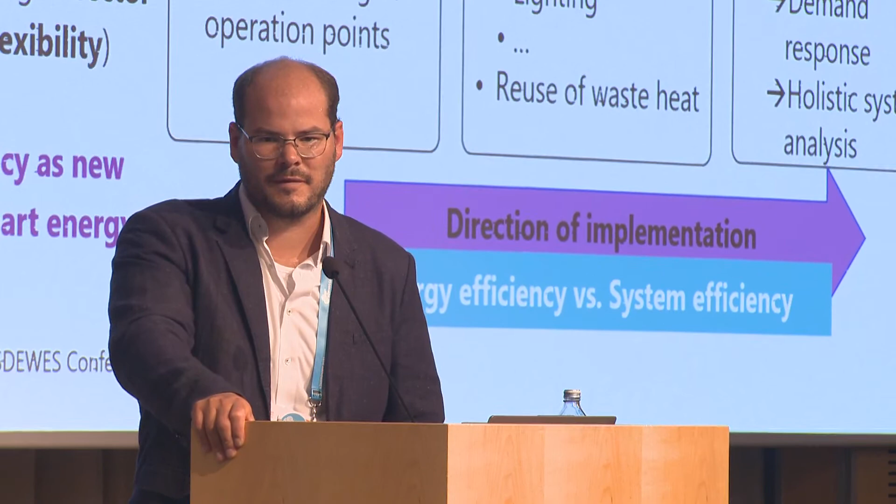Anyway, the energy system in Europe was made top-down, if we look at the power system. Maybe energy communities and a bottom-up approach might be more resilient and robust. That's really difficult to say, but I like this idea of energy communities—not isolated, but communicating with each other, sharing, or working as a flexible customer in the energy system. The community might not be fixed either; sometimes you merge communities, sometimes you divide them. It will be really interesting to see how we can change national or supranational power systems like in Europe, and make this approach of flexible energy communities happen over time—that would be a benefit for robustness, resilience, and the usage of renewables.

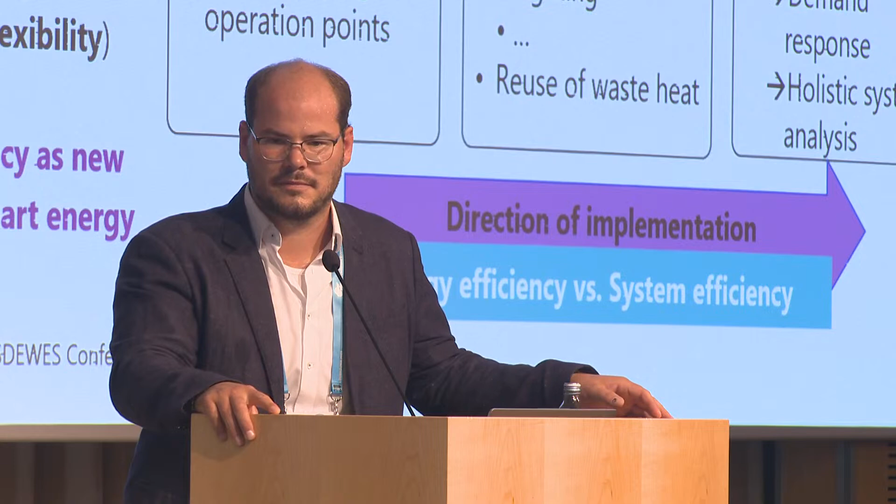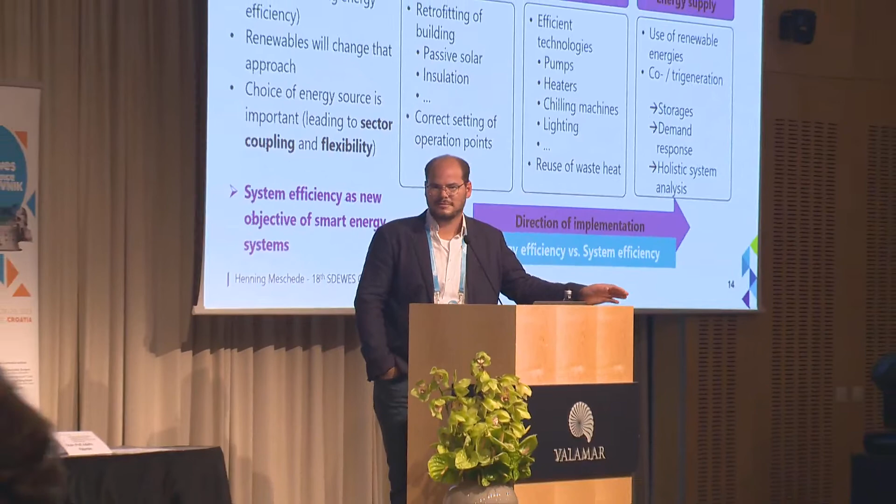Some more questions? It's getting warm here. Thank you for a very inspiring presentation. Zdravko Kravanja, University of Maribor, Slovenia.

The question is the following: we don't want to install new systems in a way that compromises biodiversity. In your case in Paderborn, do you have any figure for how much additional land you are using for installing wind turbines and PV stations, and how can that be avoided or reduced?

So you mean we should save our land? That's how it looks in Germany - we build the wind turbines and have agriculture around them. It's not that much land used for wind turbines because hopefully they're high. For ground-mounted PV systems, it's another discussion.

We're starting to think about agri-PV, using the same area for PV and agriculture, but then you build up the PV plants 4 meters high, which means you need more material for construction, but you can use the area for different purposes. I think putting wind turbines in agricultural and farmland is not the problem.